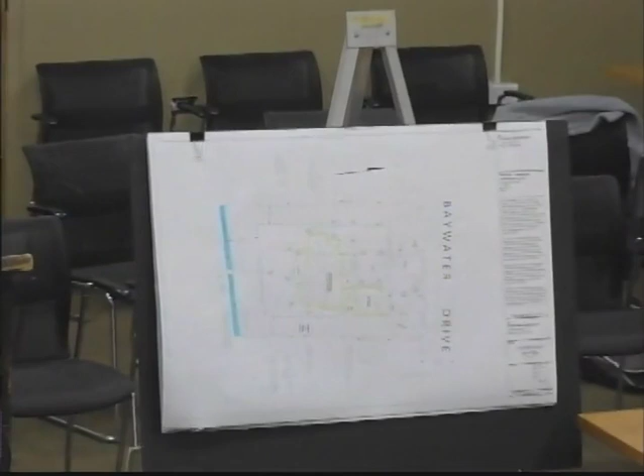The new residence will meet or exceed all the FEMA regulations and have a first floor elevation of 16.0. The garage will have an elevation of 10.3. We'll have 3 sets of egress stairs on the exterior of the building, one at the front door, one at the back deck going out to the backyard, and one on the side, which is also common with the mechanical pad on the eastern side.

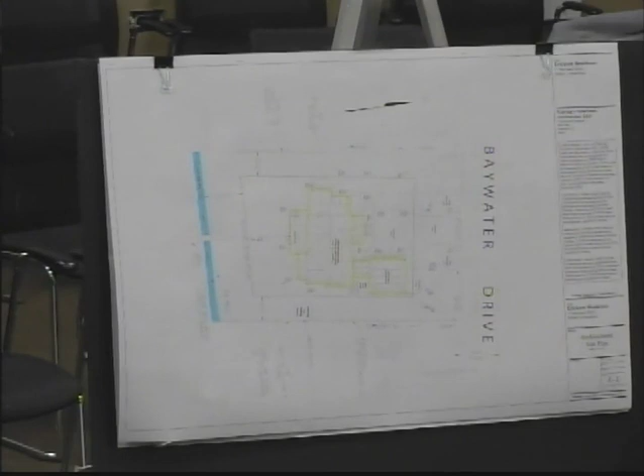We'll be sculpting the grades to comply with some of the new building regulations from the 2015 IRC. We'll be meeting all the zoning and building regulations. Another odd factor of this is we did not have to go for a single variance for this project. So that's a first, I believe, on all the projects I've done in Noroton Bay.

The structural design will be using a footing system with foundation walls that will all be designed to resist the flood damage and impacts. We'll have crawl space under the main living area of the house. The slab on that will be pitched to the smart vent foundation vents. The idea is the water can come in a flood situation, the house absorbs it. After the water recedes, it'll then flow back out.

First floor will be set at 16. All of our mechanicals will be above the base flood elevation at a minimum height of 15. The floor joists will be anchored to the foundation walls to prevent flotation, collapse, or lateral movement. A certificate of flood elevation has been prepared and submitted by the Archer Engineering Company.

All mechanicals will be set above 15, and the propane tank will be buried and anchored to a concrete slab, so to prevent flotation. So you're going to sink the concrete slab and then... Correct. Yeah, we actually excavate down, pour a slab. Yeah, there's 2 ways to do it, and that's what a lot of people do. Because it makes sense, because if it wasn't anchored to a slab, it'll fly right out. Yeah, so it's anchored to a concrete slab. The tank is then large enough. The other technique is to have several smaller tanks that are all anchored into the earth, so this is preferred.

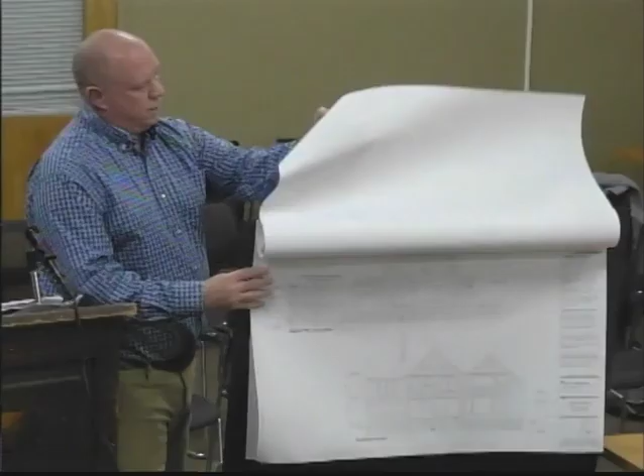Can I hold you for a second? Sure. Can you just show me on the elevation plan where the mechanicals are? I'm looking at pages SK6 and SK7. I know you said they're going to be above the flood elevation, I just didn't see the condensers and whatnot. Yeah, the actual condensers aren't drawn on it. They are or not drawn? They're not physically drawn, but the pad is drawn. So if we look at... But the pad's got to be up in the air, right? Yeah, SK6.

SK7. So we've got a 5-foot platform, the grade around there is 10. They have to be at 15, so in fact, that's the question I had to Chad before the meeting, 5-foot high platform with a little screen around it, and then Chad mentioned they're also going to plant some trees. Yeah, we'll do some evergreens that way. Yeah, so next to the garage, right?

So on the eastern side of the house, there's the side door out. 6. So there's 6 here. So this side door out, we have a pad right there, which on plan, I go to the site plan, it should be the 24. So we are right here, so here's the door out, the stair, here's the pad at 15 and a half. Okay. And then on the site plan, this cuts in.

Correct, yeah, so that is this void here. So we've got an area that's about, I think that's 10 and a half feet by close to 9 feet the other direction. It's the same thing here. Yep, exactly. That's actually on the second floor. Pretty big pad, right?

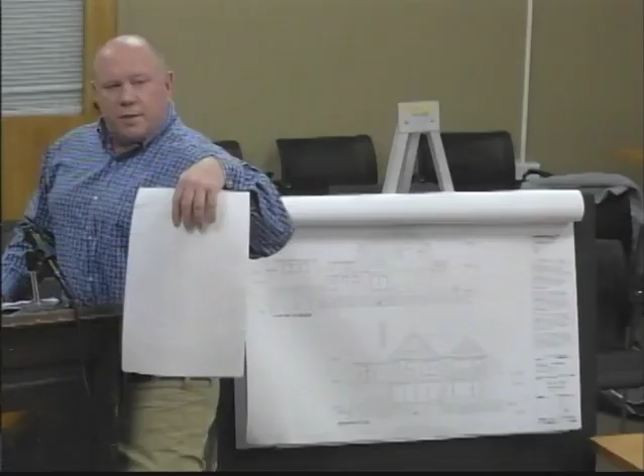It's interesting. When you do all those condensers and the generator, they all need certain clearances. It's one of those things, you just can't push it right up against the wall. There has to be some air movement around to allow those to operate properly. So it's in the front yard? It's in the side yard. So in our site plan... Okay, it's in the side yard. Yep.

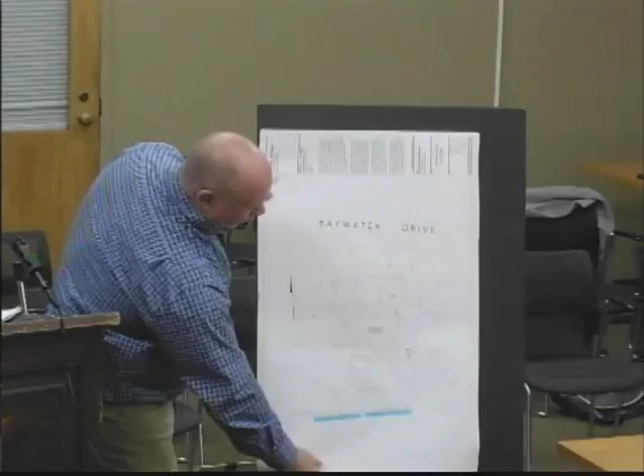So it's our eastern side. Here's the water side in the blue. Our house is situated with the garage in the front entry. This is the Frank residence to the east, and our mechanical pad is here, tucked between the garage and the stair down to the side yard. Okay.

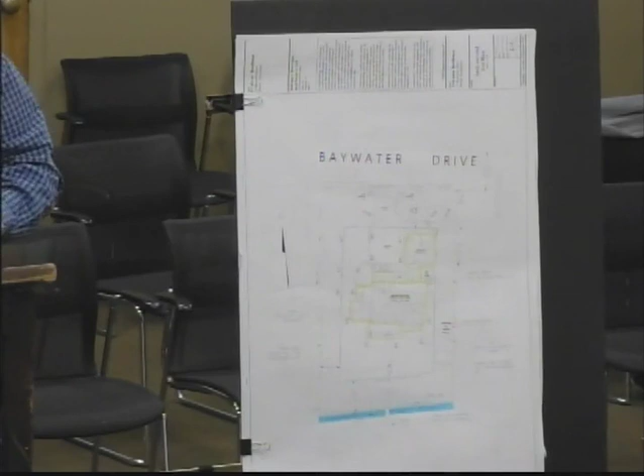Does your other professional want to speak? Would you like to, or just field questions? Could you introduce yourself? Sorry, Michelle Micoli from Martel Engineering. Could you spell your last name? M-I-C-O-L-I. Thank you. You're welcome.

We designed the stormwater to capture and treat the water quality. Because we are reducing the impervious areas, we are reducing the flows to Baywater Drive and to the Long Island Sound. There'll be 3 Cultec units in the rear to treat the roof runoff, and there'll be 2 in the front that'll treat the runoff from the garage, the water quality volume from the garage. It's pretty straightforward.

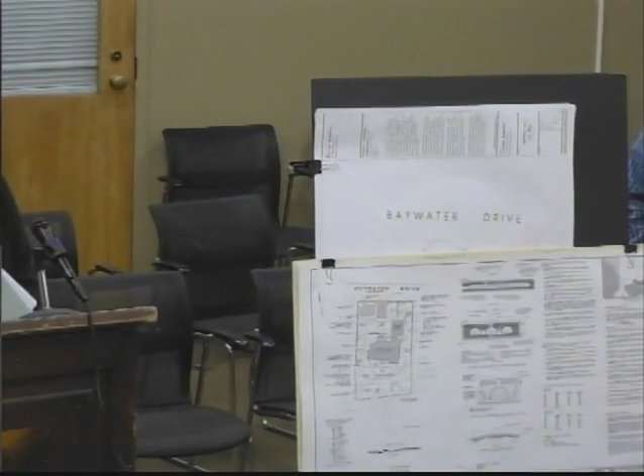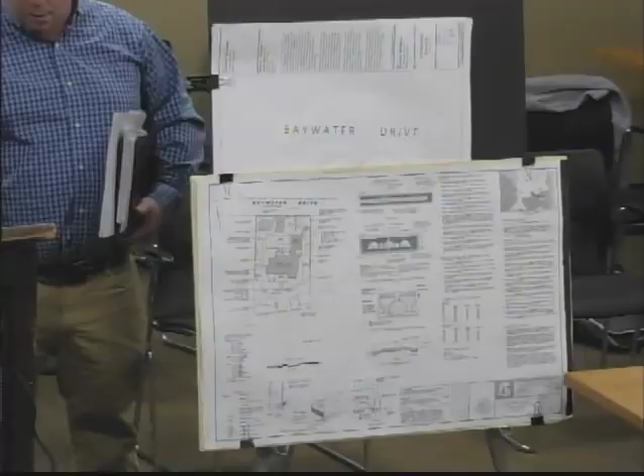You don't need the landscape and transportation, Jeremy? No. We're good, right? You all set? All set. Mr. Ray, you have any questions? I have no questions. Kevin? Would anybody in the audience like to speak to this application? Seeing none. Jeremy, anything you missed? No. I would entertain a motion to close this hearing. Do you have a second? Second. All in favor? Yes. Thank you for your time. Thank you very much.

Number 3, public hearing, land filling and regrading application number 451. Michael Gedney, 145 Old Kings Highway North. Proposal to construct a 20 by 40 swimming pool and regrade the rear yard to create a lower yard, and perform related site-development activities. The .52 acre subject property is located on the south side of Old Kings Highway North, approximately 200 feet west of the intersection of Bayberry Lane, shown on Assessor map 34 as lot number 22 in the R1 half zone. Hearing to be opened and immediately continued to April 23rd, 2019, 8 p.m., room 206, correct?

That's correct. You have Fred's staff memo in your packet noting we're waiting for a little more information from the applicant, and we told them the commission would immediately continue it to April 23rd to give them more time to revise the plans and get us that information.

Great. Moving on, item number 4, the first item of our general meeting is amendment of business site plan number 291, landfilling and regrading application number 378, Old Town Hall Homes, 719 Boston Post Road. Request for amendments to previously approved plans. Todd McClutchy and Michael Weisbrod, Crosskey Architects, are here to walk you through some of the proposed changes to the approved plans for this project. As you've all seen, the demolition is complete, and the next step for them is to get the foundation-only permit for the new building.

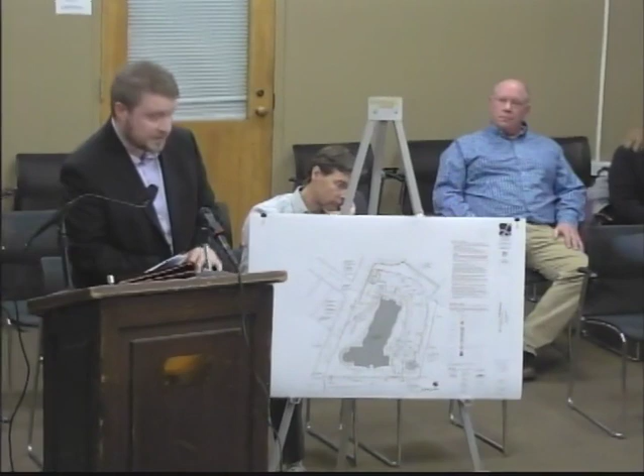The existing small building there is actually an EMT dispatch center, and there are going to be several spaces in back of the building that are used solely for that purpose. The previous plan that was approved did include a handicap space directly in the back of that building. So what we're proposing, now that we have the understanding that that's going to be used solely for the EMT dispatch, is to move that handicap space closer to the main entry of the building, adjacent to the other handicap space, given the nature of the proposed main building as elderly housing. We feel that they would get more use there.

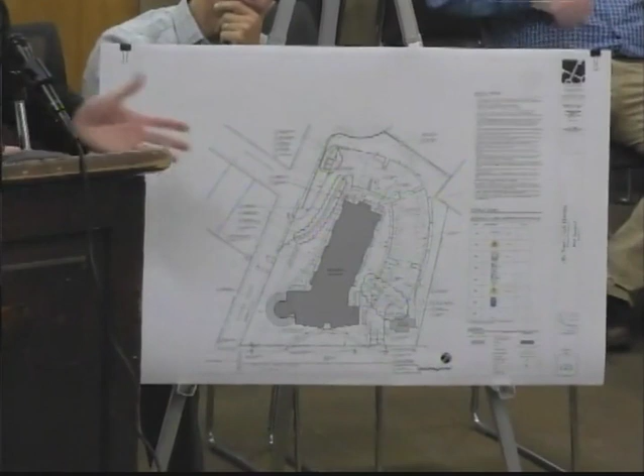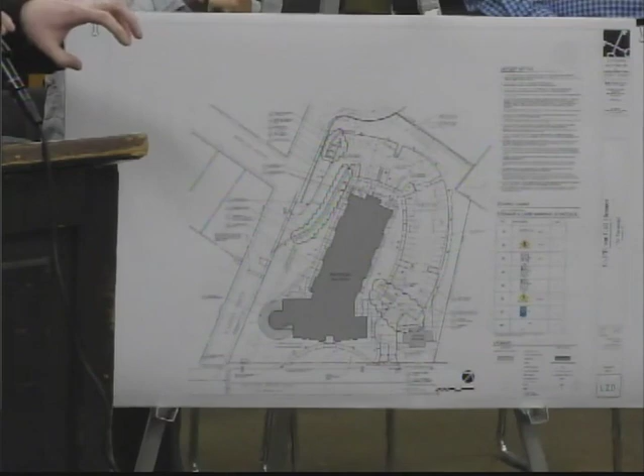In doing that, we were able to combine the crosshatch spaces of both the handicap parking spaces, gaining a little bit of extra space. And in doing so, that freed up a little bit of space by the existing building too, so we were actually able to squeeze in 2 extra parking spaces with this change. There are a couple of other second and third order effects that did occur with this, mostly on the engineering side. There are some small catch basin changes, as well as the stormwater detention system gets configured ever so slightly underground, but it's in the same location.

And the other, I'll call it small change, is the walkway in the back of the small building. It was going straight out to the parking lot before, but we're actually curving it parallel with the back of the building to allow for the potential for a future garage for the EMTs to use in the future. So that's the first change that is proposed.

Okay, hold on 1 second. Sure. Right now, behind the EMT building are 2 chase cars inside pup tents. They're not depicted on the plan here, and they're not yours. How does that layout change in here? I'm not sure of the size of the tents. Whether they go with tents or a permanent structure in the future, we're not entirely sure, but we are providing them with the flexibility to go with a more temporary structure like the tent or a permanent garage if they so choose in the future.

So I'm looking at the plan that we have, which is a little bit different than yours. And maybe Todd can answer this. Can those 2 cars sit here now? I would assume they were bigger now than what you're giving them. Is this the little building we're talking about, the EMT building? So 2 cars parked right here today in pup tents. And granted, I think if you're building a beautiful project, those pup tents are pretty ugly. So I don't know if you're going to offer the town to say, we'll build you new ones to get rid of those ugly things.

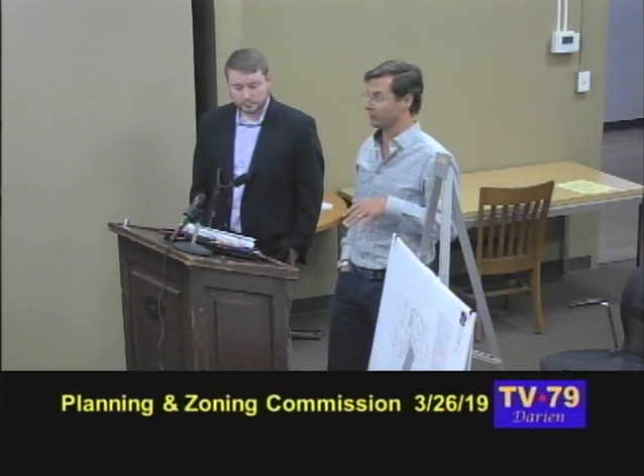So the town has a right to use 6 spaces that are closest to the existing historic building. And so what we're looking to do as part of this whole relocation is move that handicap space, which will not be utilized by the dispatch, and create some more space, whether it's the pop-up tent or something more permanent in that location. So we're allocating new space where the EMT dispatch can be located, and making sure that it can accommodate whatever structure may go there in the future.

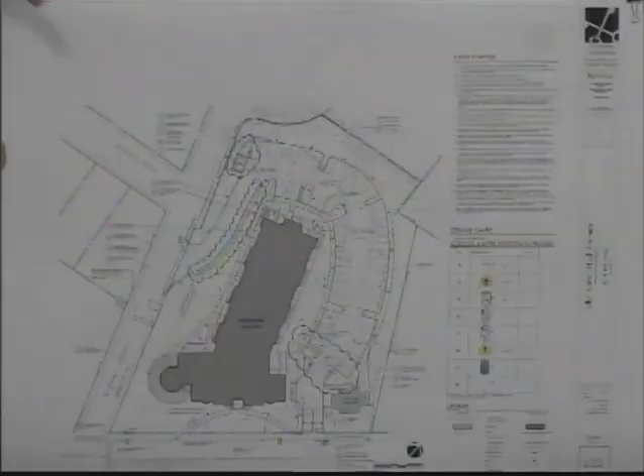Is that what you get to? I think mine might be different than yours, because mine doesn't have the cloud around it. One of the plans shows the cloud around it. It's the layout plan, I believe. There were 2 sets of plans submitted. One was the original approved plan, and one is the proposed. I got it. So you're probably looking at the original plan. Certainly, because I think adding 2 extra parking spaces is a great idea, and I think moving the handicap is a great idea.

Yes, you need to get to the bubbled one in order to. I got it. It just doesn't, to me, it doesn't seem you have enough space for the chase vans. So are those chase vans supposed to sit in those two spots inside the bubble or not? So the town has 6 spaces. How they use those 6 spaces is up to the town.

Oh, so the town can take these 6 right there? Yes. Oh, okay, 6, okay, closest to the house. I got it. I'm sorry, I thought there were 2 additional spaces dedicated inside your curb lane. Nope, because the 2 additional are all accommodated on the interior parking component. Understood. Okay. With the new handicap marker. Got it. Okay. Please continue. I'm just waiting. Thanks.

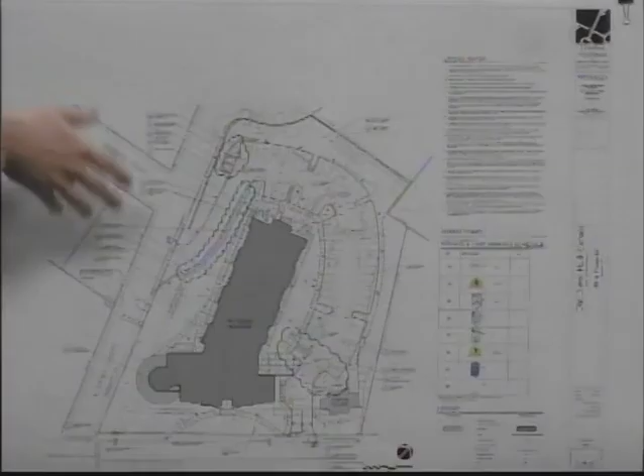So that was one of 5 changes that we are proposing. The second change is along the entry drive on the back of the site. The original design called for a modular block retaining wall to deal with the grade change along the drive and the grade on the other side. That retaining wall would have been vehicular rated. As we started to look into the details a bit more, we feel that actually pushing the retaining wall back a bit and not using the retaining wall as the vehicular guardrail, but adding a Merritt Parkway-style timber guardrail would be more aesthetically pleasing and a bit more durable. So we are proposing to make the change along the drive there as well.

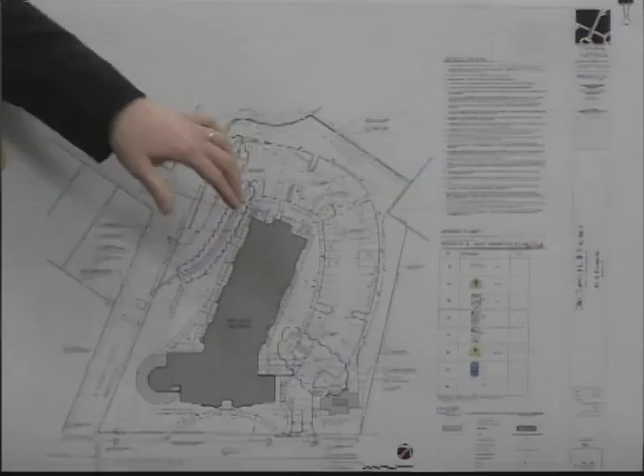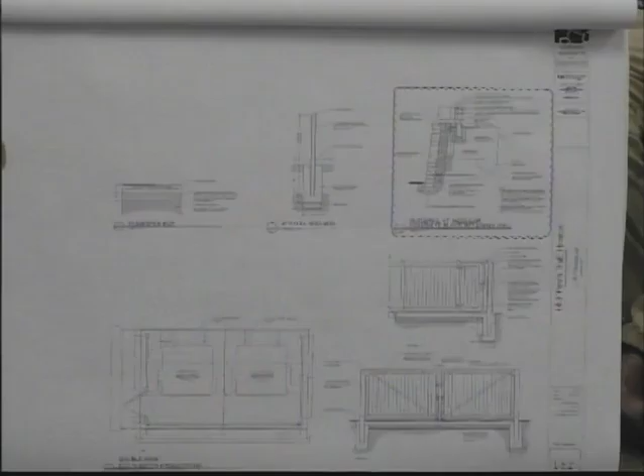The other change we're proposing... It's going to have a wood on top of the stone wall? The stone wall will be a separate element from the timber guardrail. Okay. Those are those squares. So there's a detail shown, I believe, on sheet L 5.2, which will kind of give you an idea of the cross-section that we're proposing. So again, the guardrail is a separate element pulled back from the retaining wall itself. L 5.2. L 5.1 has the original detail. That's why that was included.

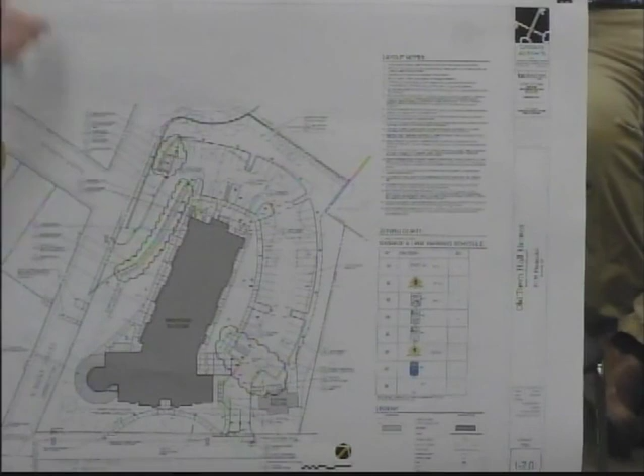Okay, so that's 2. You're 3 to go. All right. The last site change is with respect to the dumpster enclosure. All we're proposing to do here is rotate it ever so slightly so it's a little bit easier for the dumpster truck to come and pick it up and move it without having to come in at a weird angle. It's in the same location, it's just rotating it ever so slightly. If there are no questions on that, I'll go into the 4th change, which is building related. The dumpster's back in the corner on the upper left. Correct. And again, we're not proposing to move the location, just to rotate the enclosure ever so slightly.

The fourth change is architectural related. I'm going to go to the exterior elevations for a moment. The original building was designed with 5 false chimneys at the roof line, both to provide some aesthetic elements as well as to provide a means to enclose the mechanical penetrations in the roof. As we're going through some final coordination with the mechanical, we realized that the chimneys aren't big enough to house all of the mechanical penetrations.

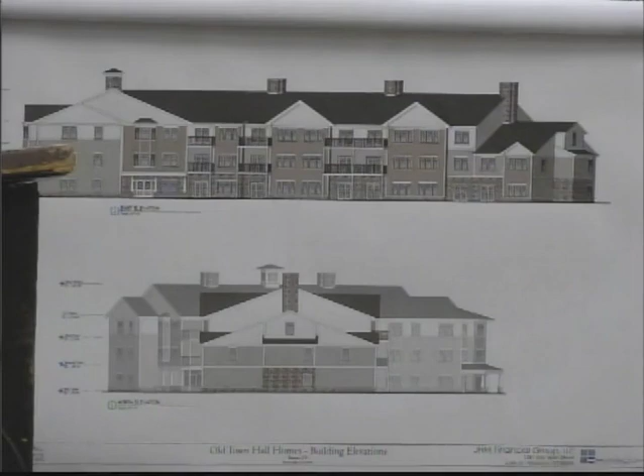So in the outline that you have in front of you, there are really 4 elements that we have in terms of mechanical exhaust. 1, we have clothes dryers. 2 is kitchen exhaust. 3 is bathroom exhaust. And 4 are the furnace exhaust and intakes. We felt it would be best to conceal the furnace intakes and exhaust in the chimneys, given that those are the most unsightly. And the rest of the exhaust we plan to distribute on the back side of the roof away from the main street, as well as doing some sidewall penetrations on the far back side of the building with the dryer exhausts. So I'll kind of walk you through those on a separate plan.

So there's no change. What they're doing is adding on some other vents throughout the building to get the necessary venting that didn't fit through the chimneys. So there could be a few sticking out the side, in the back, out the roof, in the back. But the chimneys are the exact same. We're going from 4 to 5? I mean, 5 to 4? No, the quantity will stay the same as approved. Oh, you said it was 5 going to 4.

Not sure I said that. There are 5 chimneys approved and 5 chimneys proposed, because the chimneys won't handle all the... Okay? I just looked at this and see 1, 2, 3, 4, 5, 6, 7. It's the square with the square inside of it, correct? There's a cupola on the front of the building, but there are 1, 2, 3, 4, 5 chimneys on the roof plan. And then what are the extra ventings?

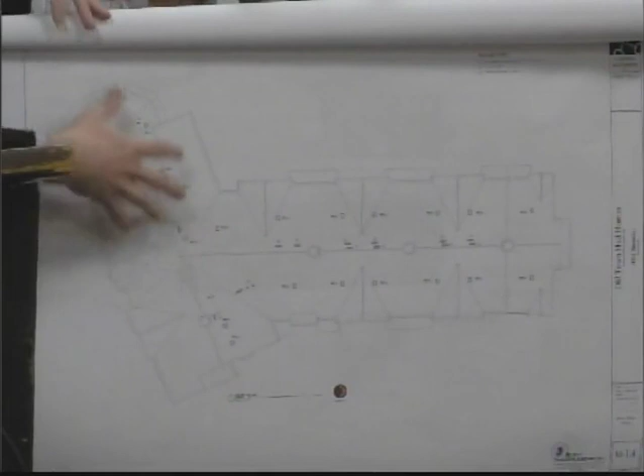So all these little symbols are the other vents. The ones that are tagged REFA, those are the kitchen riser exhausts, so those will stick out of the chimney a bit. Those deal with the kitchen exhaust for the stack of 3 units below that riser. There are some units in the front of the building that we will be elbowing the exhaust within the attic so they don't penetrate the front of the roof facing Boston Post Road. So there are several locations where we're offsetting in the attic just to provide a clean roof in the front.

We're taking that same approach with the dryer exhausts as well. In most cases, the dryer exhausts come up in a straight line with the riser below and penetrate the roof there. Again, on the front of the building, we are proposing to elbow them in the attic so they do not provide any penetrations in the front of the building.

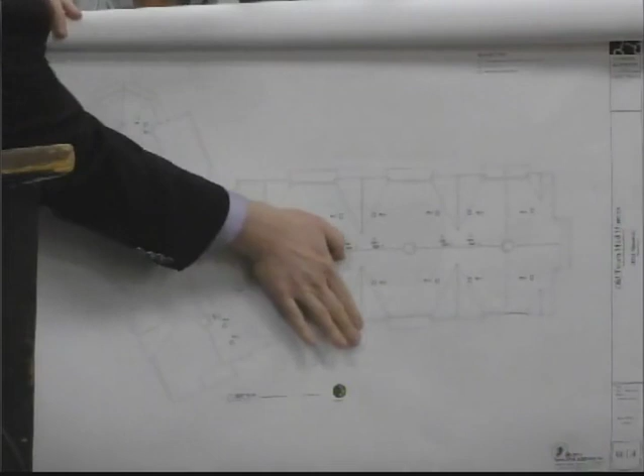The bathroom exhausts all tie into an ERV mechanical unit in the attic, which is an energy recovery ventilator. That has a louver facing the side of the building, which is disguised as one of the gable elements, which I'll talk about in a minute. And as I mentioned before, the mechanical exhaust and intakes for the furnaces are all concealed within the chimneys, and there's just barely enough room to fit those elements in there.

Is there much changing on the facade that faces Academy Street? No. Thank you. That was our goal. I mean, it's important because you drive down that street, and it dead ends at Academy, and everyone makes the right, and that's what they're saying, that's what they want.

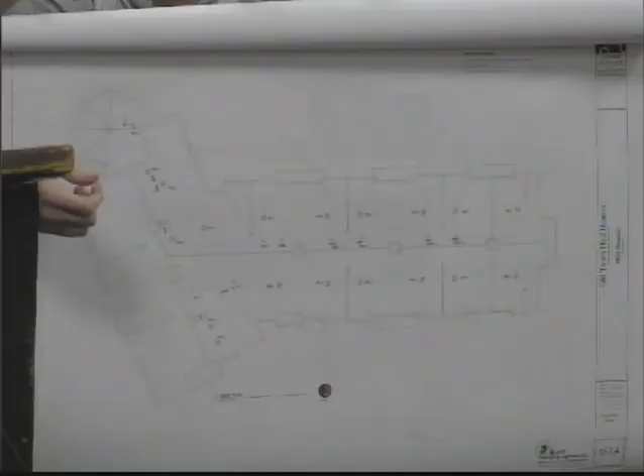So there are a handful of dryer exhausts where we're not proposing to go all the way up to the roof, just given their location. Towards the back of the building, there are a couple that we just want to go straight out via the side of the building with a small 4x4 dryer vent that you would see on a house. Nowhere close to the street. There'll be another one kind of tucked back here, facing the back. You wouldn't see it from the road.

Does every unit have a washer dryer? Yes. They have a hookup or they have a washer dryer? Hookup. Okay, so it's possible that not every single one of them will have one. Correct. But they will have vents. Yeah, no, I get it, it's standard practice on every Avalon project and every Seth Bernstein project. That's the call. And I'll show you just where those occur on the outside of the building. Elevations, if you're curious.

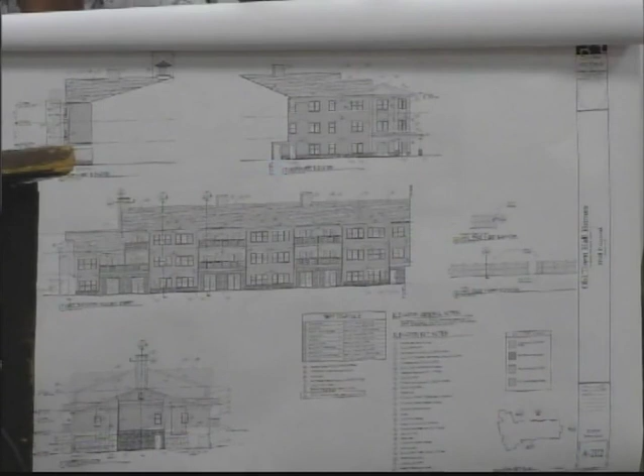So I did my best to highlight these in red on the next sheet, A202, which is the exterior elevations. As you can see, there are only a handful. One on this little return, as I showed in the last plan, facing the back of the site. And there are 2 groups on the very far back of the building, again facing the rear. So you would not see this from the road. Okay. From the 2 roads, which is Academy and Post Road. Correct. Right.

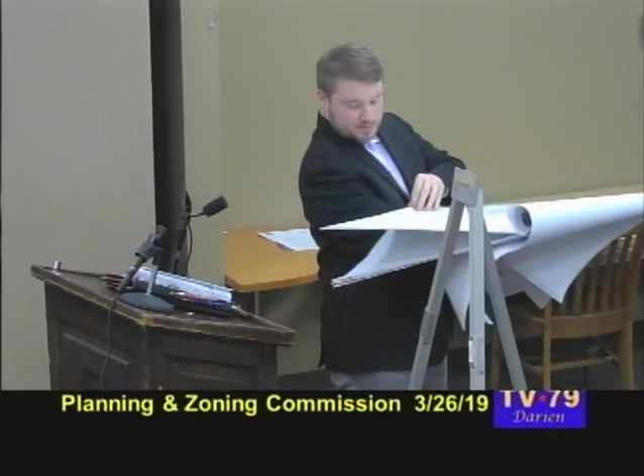So the last change that we'd like to run by you, and this is really just running the concept by you at this point, because we're not sure if the project can afford it as of yet. We'll know more once we get further into construction. The main entry of the building does have a cantilevered second floor to protect from the elements for a portion of the path from the front door to the drop-off area along the entry drive. But there is a good portion of that walkway that is uncovered from the elements.

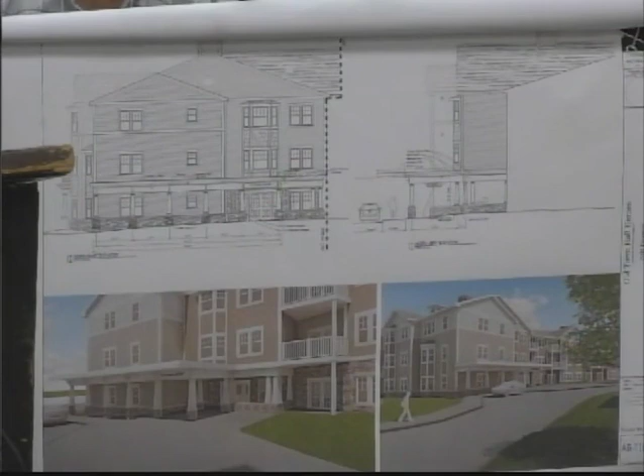So if the budget allows, we were contemplating creating a covered promenade from the rest of that cantilevered element to the drop-off area, using the style of the building as inspiration, to make it blend with the architecture that's already there. So we did include some renderings and some elevations of what that might look like, but it's essentially using the same vocabulary as we have on the front portico of the building. And where's the drop-off area again? The drop-off area is on the side that's near the EMT side.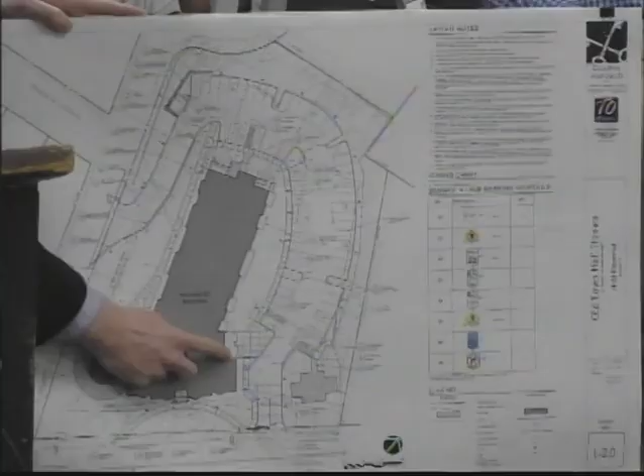It's basically, so here's your main entry overhang right here. The covered walkway would come out, follow the walkway, and terminate at the end of the building. Okay. So it's covering sidewalk that's already proposed. So perhaps an area to put a bench in front there if people wanted to just step out there. And we do have some built-in seating under the covered entry as of now, but we could expand on that.

Jeremy, do we care about lot coverage off of that? If you cantilever it, it increases lot coverage by a couple of percentage points. Yeah, I think they still have plenty of room in terms of lot coverage. But I'll double check that. I think it's a great idea. Yeah, it makes sense. Covered area for somebody to sit.

Okay. Who else has to look at this? Do you have to look at this? I would say it's such a minor change that the commission can just handle it. Oh, this is great.

Hope you get your budget. Thank you. So do we. You don't want fabric. Or glass, like they have a big one.

Let's start on this side. So Ken, do you have a question? Nope. Would anybody in the public like to speak to this application? Seeing none? Jeremy, what am I missing? You would just need a motion to approve the amendments as proposed. So we're going to approve the amendments as proposed, and if they do the entryway, they do it. Okay? I would entertain a motion to approve. Motion to approve changes as proposed. Second? It's a second. All those in favor?